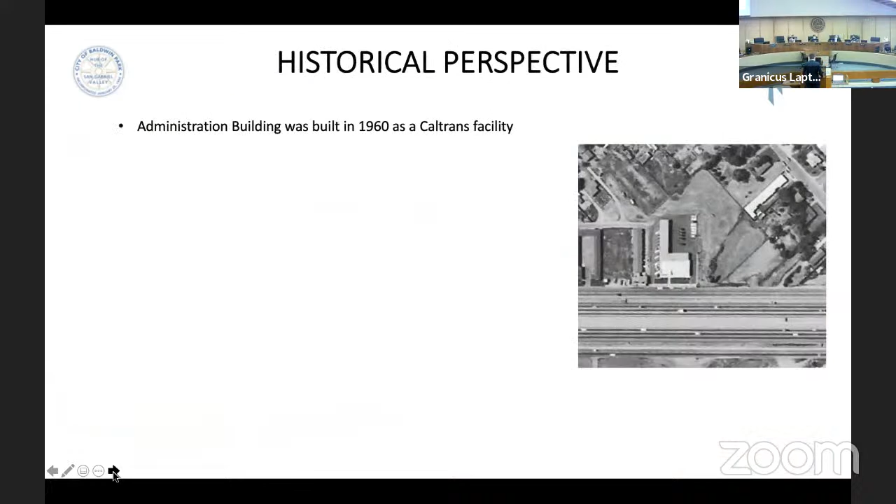Good evening. Thank you very much for this opportunity to present. We've been tasked with taking a look at the city's public works yard improvement goals, categorizing them, coming up with an approach, and summarizing some of the key tasks. My goal for today is to walk you through what our findings have been. If we can switch to the next slide and do 4 additional clicks to get the material on the page.

Before we dive into what we recommend, it's good to know where you've come from. This site, effectively, is actually a Caltrans site. The 1960s is when it was built. The city took over that site in 1978, built a garage, a warehouse, fuel islands. From '78, nothing really has happened on that site except for incidental improvements. Then in 2017, solar panels were added. So that's really the site we have, a 1978 site, but you have operations that are from the 2020s now. We're looking to find out what those improvements are.

Previous studies had indicated a $2.5 million budget. Of that $2.5 million, $300,000 had been previously allocated for design, $200,000 reserved for construction contingency, which leaves you with a $2 million construction budget. So we're looking at that $2 million: how can we take the city's budget and maximize that? I'm going to take you through the categories of work here. If we can go to the next slide.

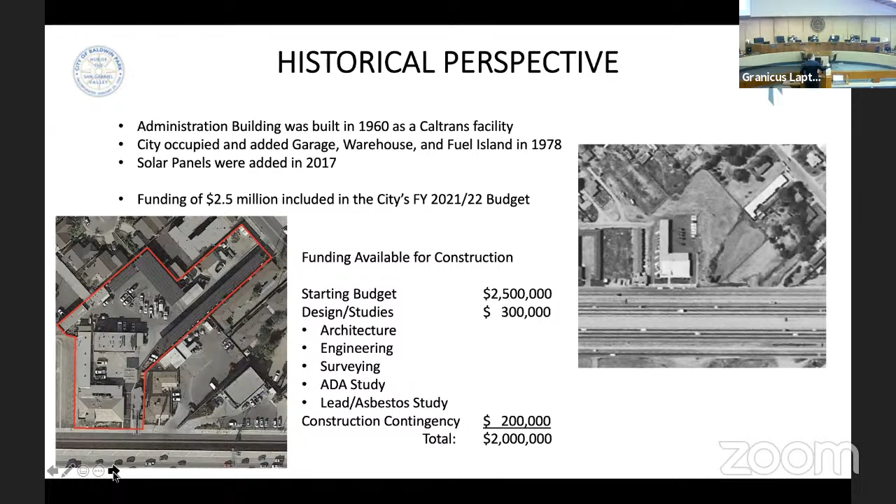What we did was break down your categories of work into 2 main categories: building improvements and site improvements. From there, 8 subcategories that I'm going to walk you through individually today. There are so many items in each of these that we would spend a whole presentation on each one, so you'll have to forgive me for the low detail of pictures. There are so many pictures out there of items that need improvement, so we've gotten some representative items here.

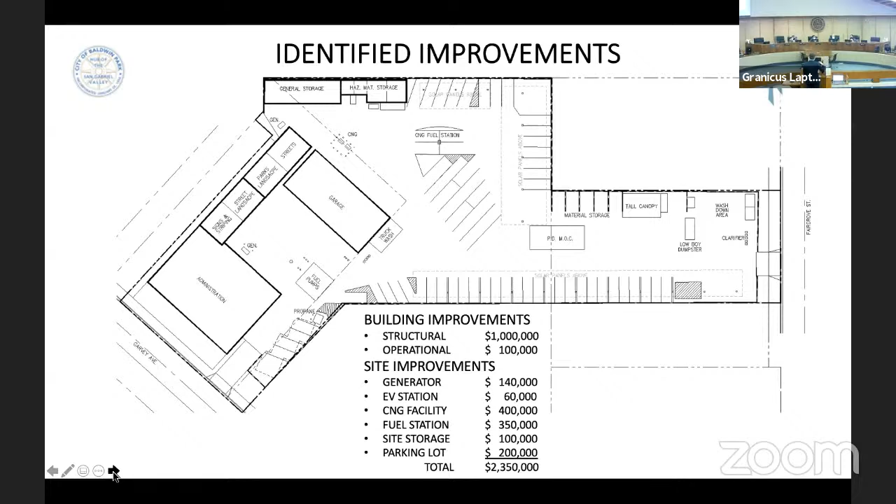Effectively, we're looking at structural improvements, about $1 million. Operational improvements for the site is $100,000. Moving on to the site: $140,000 of generator work, $60,000 for an EV station, $400,000 for your CNG facility, $350,000 for fueling station, $100,000 for site storage, and lastly $200,000 for a parking lot, coming out to a total construction cost of $2.35 million. That's above the $2 million initial estimate, but the goal here is to start categorizing the work and then bidding them out in a way to maximize your benefit. We can go to the next slide and click 3 times for me.

Moving on to what we're calling the annex buildings.

Those two blue highlighted areas on the screen show where there's a tremendous amount of storage being done for different public works divisions. We have a lot of opportunity for optimizing those areas, primarily by getting palletized shelving and good shelving in to get better use of space. Additionally, we're looking to add roll-up doors for better access in and out so material can be brought in safely. And finally, insulation and ventilation for those areas.

A key critical component is that the city clerk and the building department need storage for their records. The top box on your screen, about half of that, is currently being conceptualized to be used for your document storage. That's an important part of the city's function, to make sure you have the space for your records, and that can be relatively easily incorporated into these buildings. So that's the annex work. We have $100,000 allocated for that.

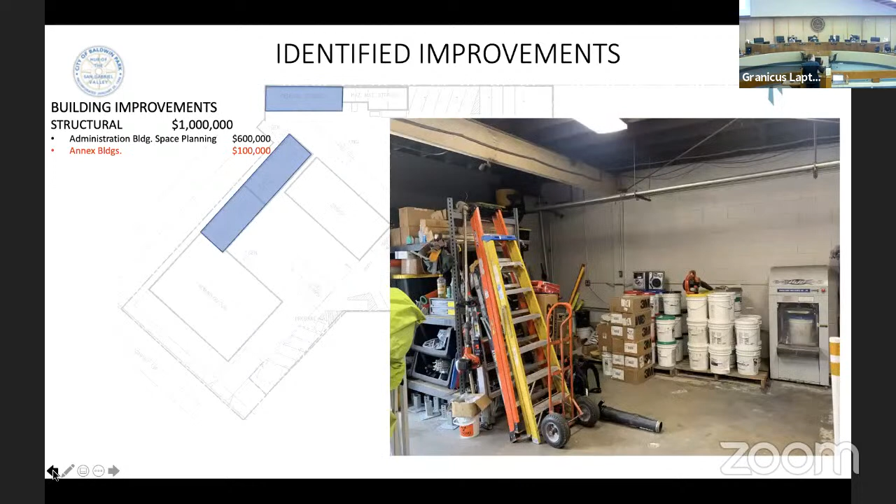For the garage, ultimately the main improvements we're looking to do here are elevated storage, again to optimize the space and give the workers the necessary space to work. The roof does need replacement, and finally, we're adding some plumbing for undercarriage work. That's $100,000 for your building improvements.

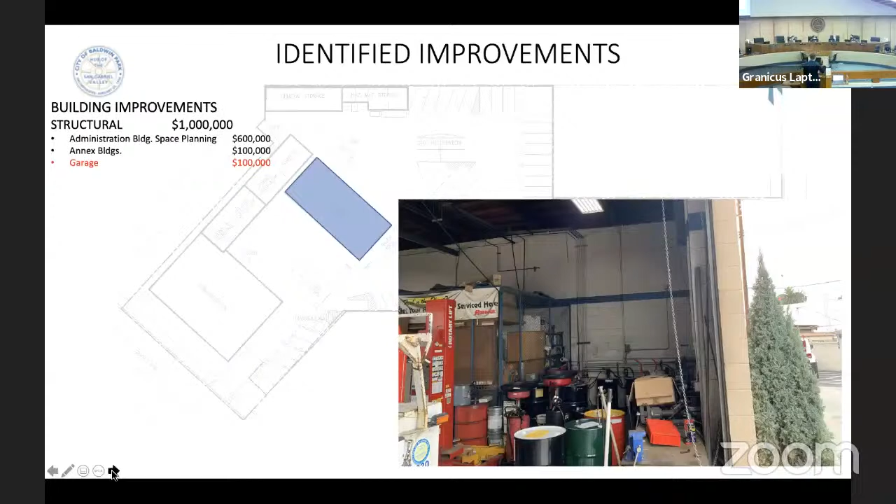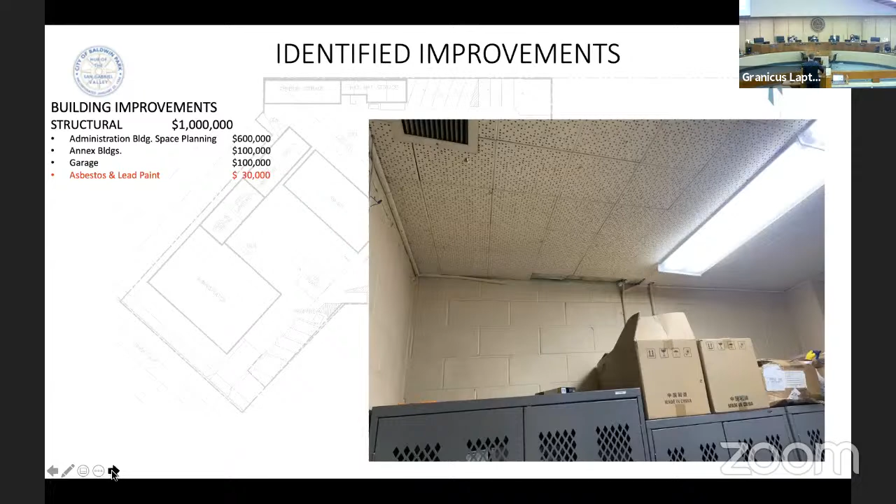Due to the fact that these buildings were built prior to the 70s, there's an extremely high, almost certain likelihood that there's asbestos and lead paint within the structure. As it stands, it's not a health hazard, but construction work causes exposure. So what we're looking to do is get that remediated. We've allocated $10,000 for an asbestos study and $20,000 to have that work remediated. It's very important that this be done before improvements are made here.

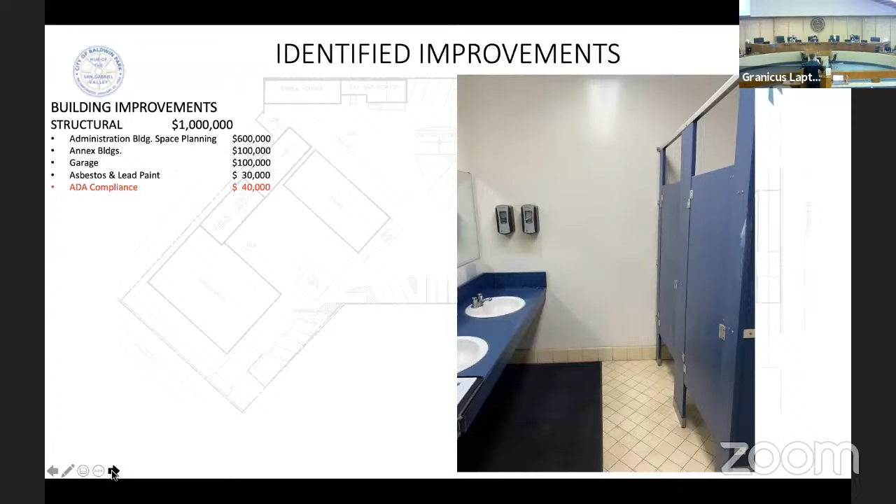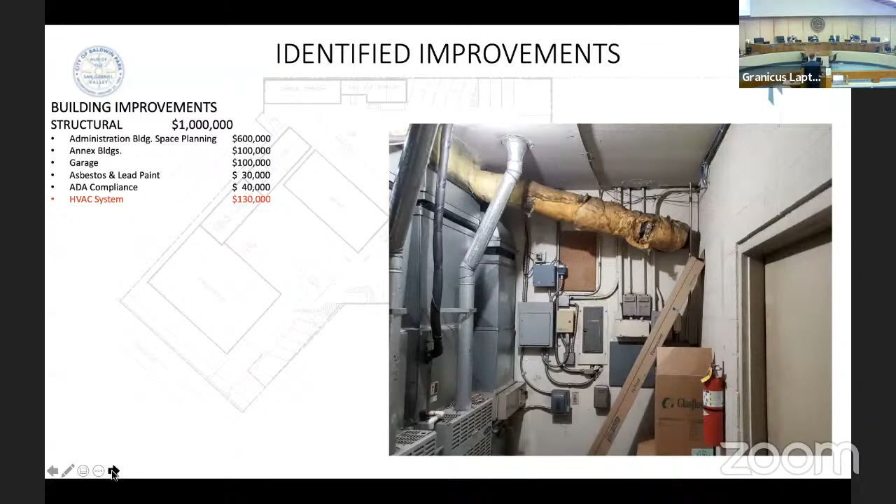Next item is the HVAC system. The HVAC system does need to be replaced within the building. This $130,000 budget includes the cost for upgrading, repairing, and replacing the elements, potentially even incorporating a heat pump or other items to maximize the benefit to the site. It's important that this be budgeted for the site to make sure the improvements are incorporated with functional HVAC systems for climate control.

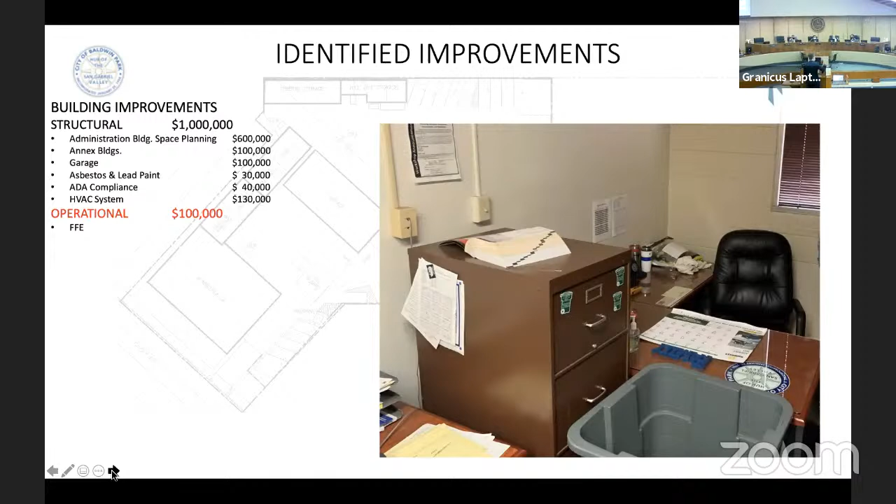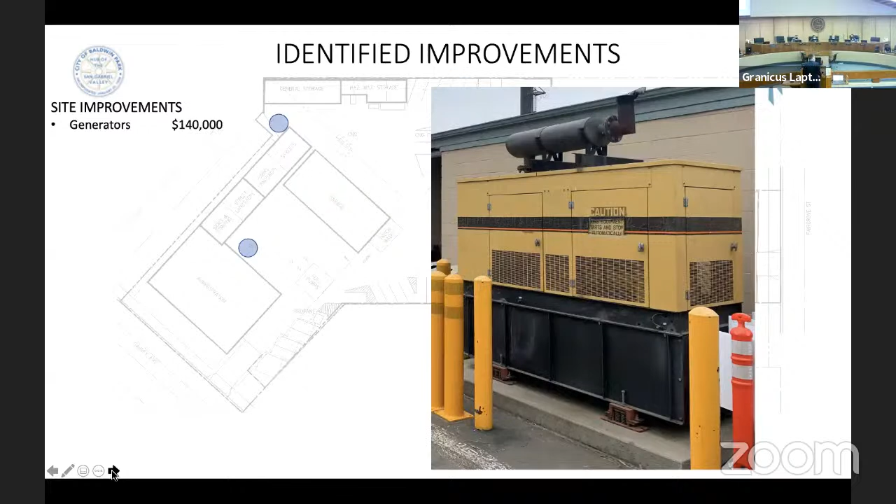EV stations are also recommended for the site. The incorporation of the EV system will help you accomplish your AQMD goals for air quality. Additionally, installing these will help you capitalize on the fact that you have solar panels on site providing power to the EV stations, really doubling down on that benefit. This item is incorporated for $60,000.

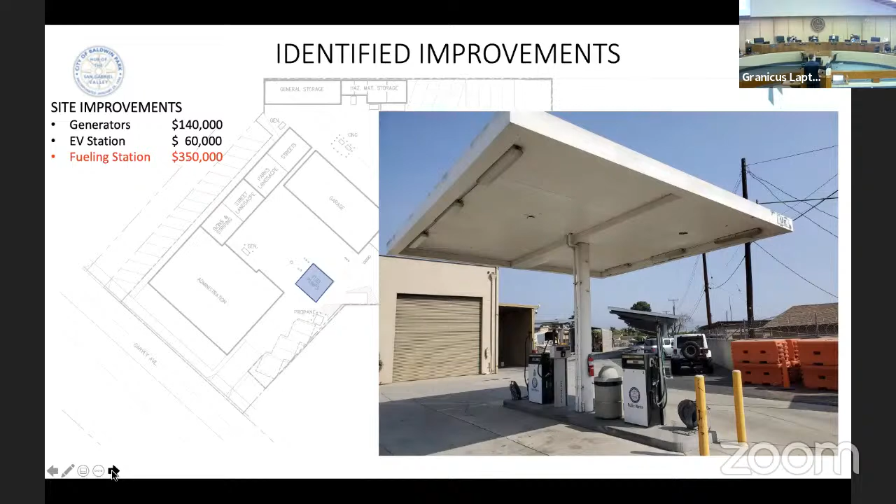For the fueling station, there are a number of problems currently with the site. Primarily, every time it rains, fuel systems are set up with a trigger where if water gets into the manhole, it shuts down the system. So one of the items we'll be doing is grading to make sure water appropriately drains away from the manholes and doesn't concentrate to shut down the fuel pumps. Secondly, the fuel pump system as well as the grading around it needs to be replaced, so the islands would be replaced. Lastly, large vehicles currently cannot fit under the canopy. In situations like this, it's possible to retrofit the canopy to raise it up while using the same canopy, getting those larger vehicles in to fuel. Those items total $350,000.

Additional items that are very important functionally: the police department's mobile operations center is currently within the yard, and it's severely impacting vehicular traffic as well as access to the material hoppers. It will be important that a functional and more viable space for that be presented in the future so we can actually free up the space within the yard.

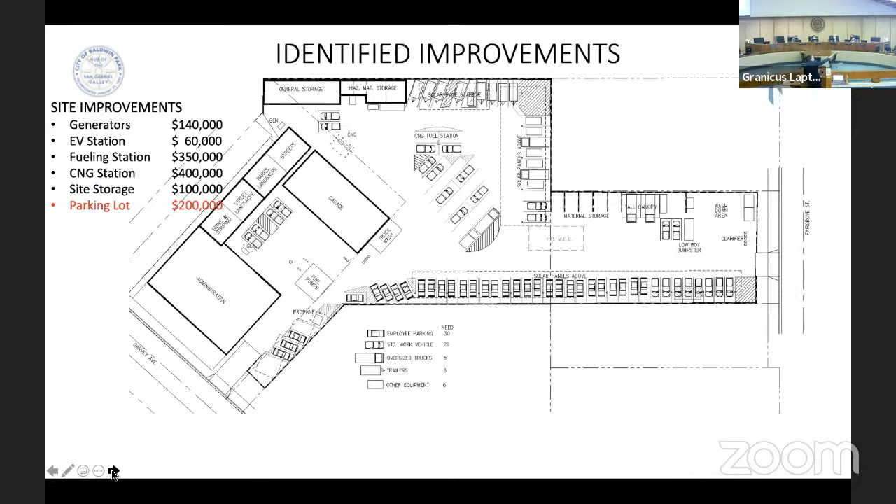That's one of the big goals, to create more functional circulation. This is ultimately what the final layout would be with that mobile unit gone. We can extend some parking and still have a full row of parking on the bottom edge by putting storage above the vehicles, logically adding a couple more parking stalls in that fuel storage area to the left. So there's a lot of potential for optimizing, but it's going to take careful planning on these other tasks.

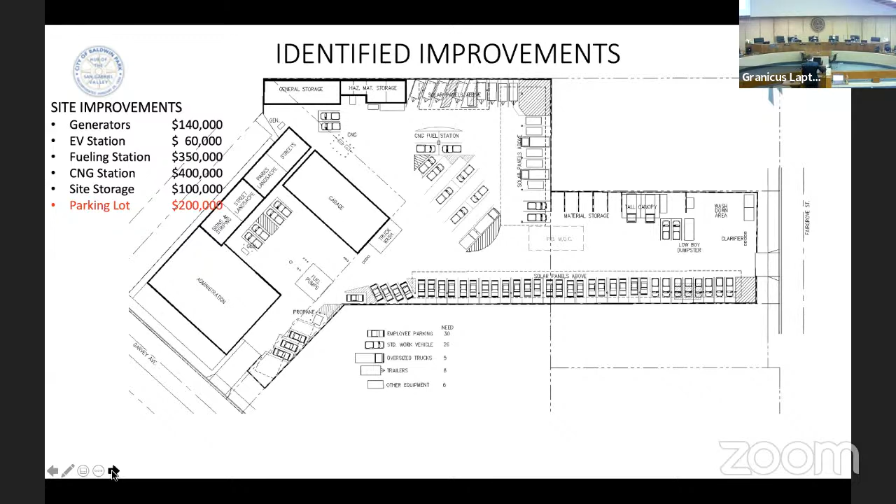And then the last item is the parking lot. The pavement on the site is completely degraded, effectively in a failed condition. Anytime you see that alligator pattern on pavement, effectively it's gone, and it's a matter of how you can most cost effectively rehabilitate it.

Public works yards do have the option to do alternate pavement technologies. The problem is you end up spending more time curing them, and usually yards want to be open right away. So essentially we've allocated about $200,000 to allow the city to rehabilitate your pavement. Also, one of the big desires is to widen the driveway apron entering the site, so larger vehicles can have a better turning movement into the site and not have as much conflict.

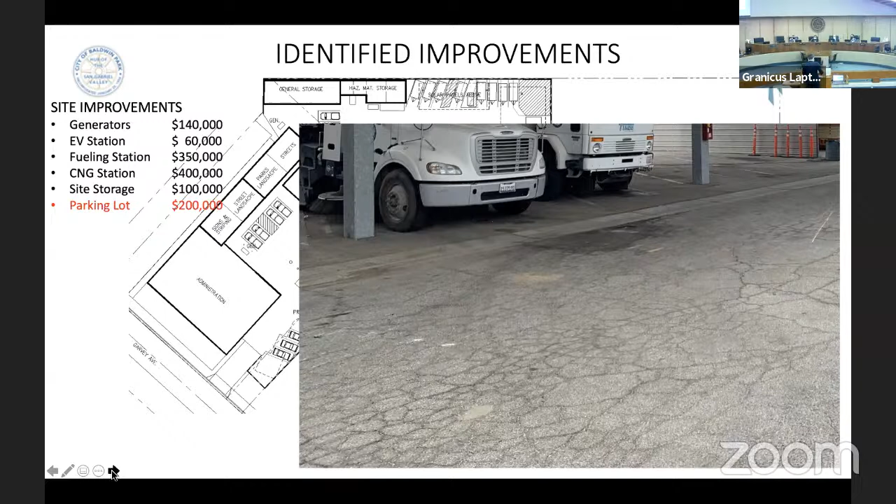Ultimately, this is where your total budget ends up being right now, including the $300,000 of design costs and the construction costs, with an estimated budget of $2.85 million.

At this point, the request is that the $300,000 for design be authorized so that the remaining items can be appropriately designed and vetted. One of the most effective ways to bid these types of items is with alternate bid items. What we recommend is incorporating more project than you believe you can afford, because you don't know where your bids are going to come in, and effectively allowing those to cascade onto each other, authorizing the amount that you can afford. This helps put more detail to the work you're doing and gives you more confidence moving forward.

That concludes our presentation, and I can open up the floor to any questions.

Mayor Pro Tem: Thank you for that presentation, and I agree with you, there wasn't enough pictures to show what the place actually looks like. I've actually done a tour of the facility inside and out, and I agree that it is not a place where you want to come to work and pick up your morale, at least not the site. I went inside the facility, and I definitely agree it needs to be redone completely. It's dirty, it's ugly, it's old, it smells old, and it's not safe for our staff.

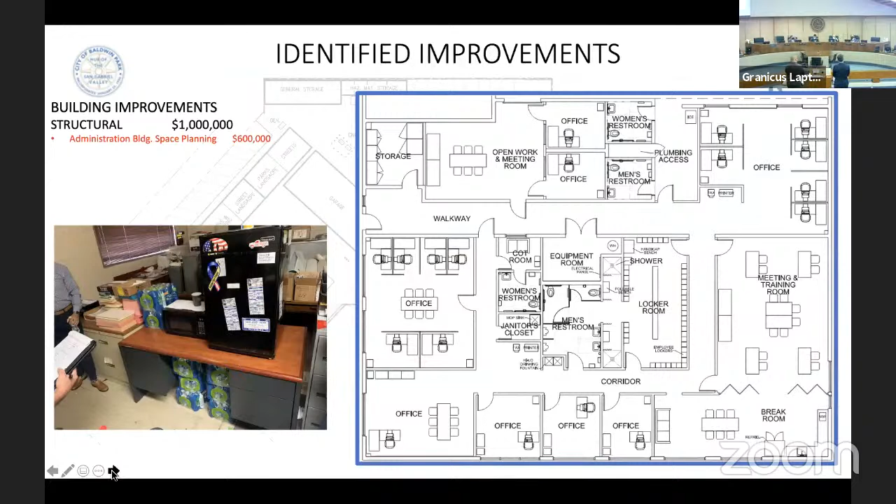The computer space, you said part of that budget included furniture and computers as well, or just the furniture? Correct, the intention is to have that $100,000 budget cover your FFE needs, so that would be the furniture, fixtures, and equipment. Okay, that's perfect, because I really didn't see a lot of spaces where people can come in and have a nice place to actually do their work, as you saw in that picture.

The storage above the vehicles in the parking lot area, how would that work? And would it be a liability of that collapsing on top of any of the cars?

Yeah, so the storage above the vehicles, there's a number of systems. One type is a manual system where it's palletized, so you would end up having a forklift bring things out. There's also hydraulic systems where they cost more, but effectively, if you pull the vehicle out, they're able to lower themselves down for direct access. So it would be an equation of cost. However, those palletized systems would all be rated for the weight and the equipment that's placed up there, so it wouldn't be a problem of it falling because they're designed for those purposes. And so, of course, to move things in and out, we would make sure there's no vehicles at the time.

Absolutely. Okay, that was a concern with that. And the CNG, it's non-functional. What do we use that for?

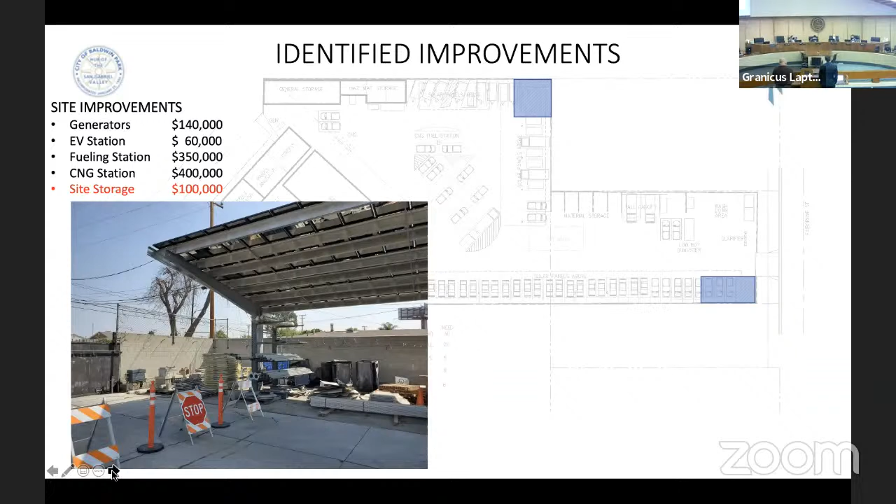The CNG station is for fueling natural gas vehicles. How many natural gas vehicles do we have right now? I'm not familiar with the system itself, other than it's one of the functions of the city's vehicles. Is anybody else able to speak to the CNG? Yeah, so we currently have two sweepers, our primary sweeper and our backup sweeper are CNG. And I want to say we have at least a dozen CNG vehicles that we would use this station for.

And where do you charge them now? Waste Management, you go to Waste Management. Correct. How far is that from here? Is it the one on Live Oak? Yes. And how much does that cost? I don't know the exact number, but it's quite expensive.

So if you can get us the numbers so we could see the cost savings of us not having to go. I know initially it'll be a cost to replace that, but in time that money will come back to us because we won't be having to pay for us to go to Waste Management. Do you know if that's paid on a monthly basis, or how we pay for that, based on the number of vehicles we take? Yeah, it's based on consumption, however many gallons we consume and fill up. I know that the initial PO we opened up this year was $10,000, and I believe we have exhausted that amount since July 1st. So the sweepers run all day, 10 hours a day.

Plus I know other vehicles, staff, they use it to go to and from across the city, and it runs almost all day long. So we do consume quite a bit.

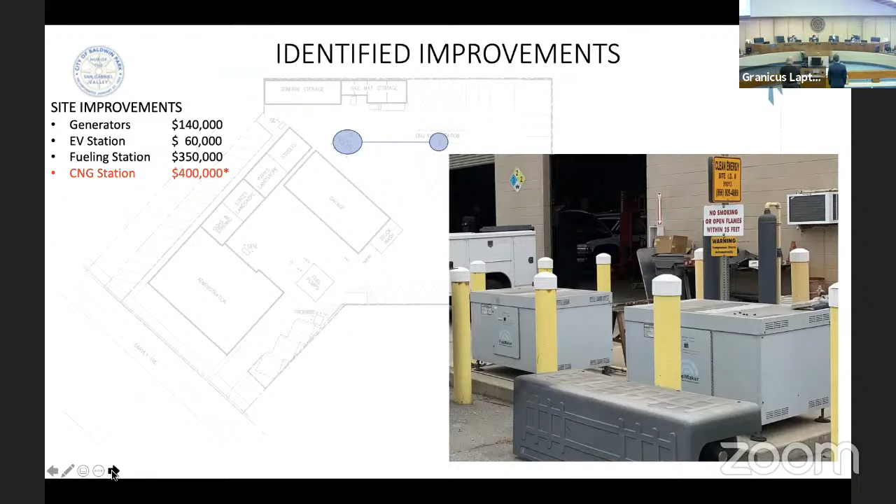Okay, perfect. And I was happy to hear that we could get grants to be able to lower the cost of the CNG plant. Those were all my comments, but I do agree that it's in dire need of getting not just a little facelift, but a complete do-over, because it is in very bad shape.

I don't think it's good for our employees to come into their place of work, their offices, their lunchrooms, the way it looks. That's why maybe next time you can put actual pictures of what the lunchroom really looks like, what your offices really look like, a complete picture, so people can get a better idea where you go to work every day.

You come from your comfortable home to where you spend most of your day, and I think you should be able to work comfortably, to be able to sit down and have your lunch and relax, and know that when you need to access your CNG or store anything, that it is safe for you to do so, and that you're not going to have any problems, so that you can go about your day without having to worry about other things. Thank you for the presentation, I appreciate it.

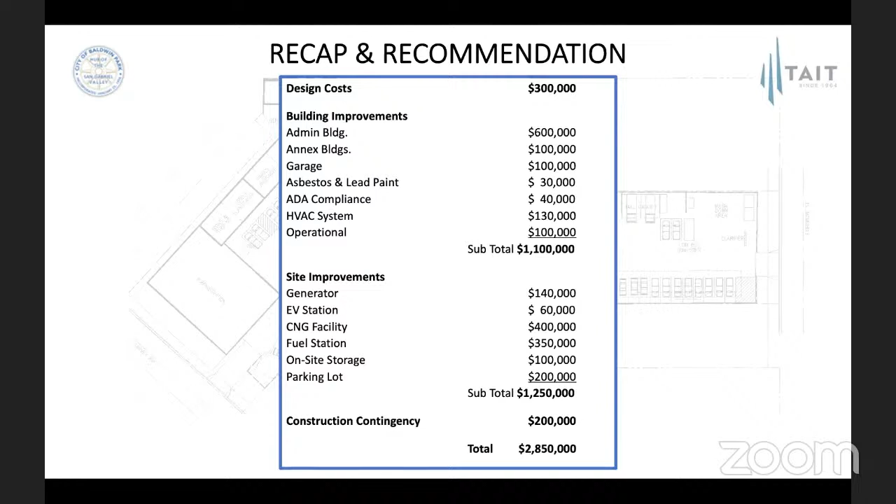Yeah, so we are looking into anywhere between 2 and 4 stations, and we want it to be the supercharging type, so that we can charge more than 1 vehicle per day or per hour. I think right now the slow chargers take 4 hours, and we can get that down to under an hour, and we'll be able to charge more vehicles as we transition our fleet to an electrical fleet.

Right, and so, perfect, so just for clarification, these are the superchargers, right? Yes. Okay, thank you, that's all the questions I have.

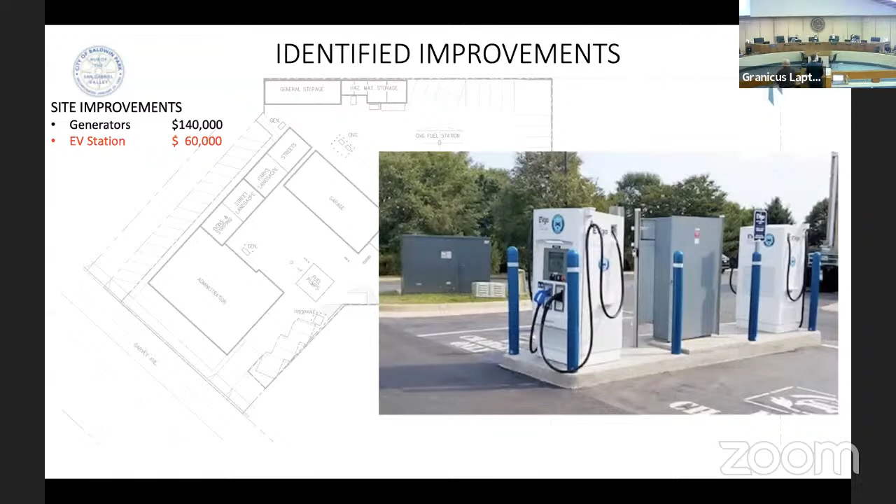Okay, if there's no other questions, I do want to let the council know that we do have a staff report in consent with, as David mentioned, the recommendation to allow us to move into the design phase, which is only $300,000 at this time.